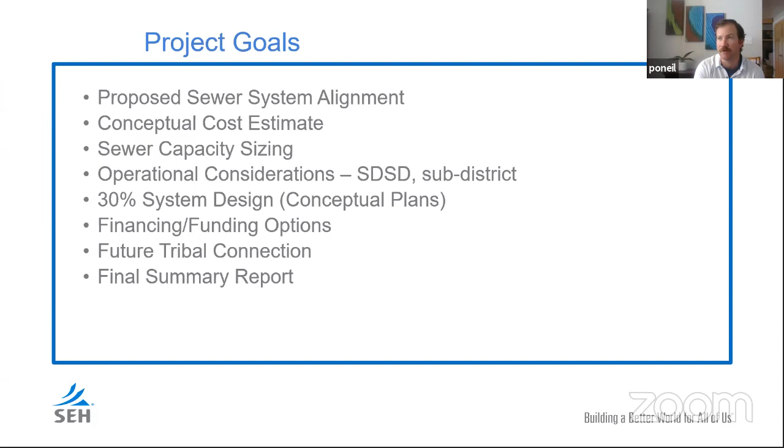The proposed sewer system alignments - we've developed conceptual alignments to serve this area. You can consider these as trunk lines or main lines. There will be additional lines that feed into this system. So we've just looked at kind of the main trunk lines to serve a majority of this area by gravity as much as possible, and where needed, lift stations and force mains, which take the sewer that we can't get to the main lift station. They then pump it up to the main lift station so that we can send it to the South Durango Sanitation District plant.

We developed phases to kind of break this project into reasonable chunks. By no means are these set in stone. They are our attempt at coming up with a reasonable phasing based on properties as well as location and relation to the gravity or lift station system.

At this point, I'm going to try to switch to some of these alignments to go through them briefly. The files were a little too large to attach to the PowerPoint presentation.

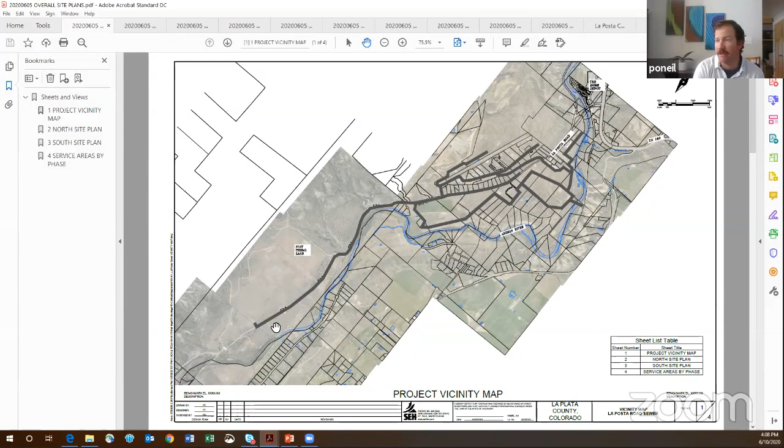Here's kind of the overall site. Being on this call, I'm sure you're all familiar with this area, but this is kind of the overall study area. Most of it is in the La Posta area here. This portion was added to evaluate the potential future inclusion of the Southern Ute Indian tribal land, in the event that they elect to develop and or connect to this system.

Here is a phasing map, which shows the different phases that we've broken out so far. Phase 1 here in green would be the initial lift station and river crossing to get sewer to the east side of the river, where it could be treated by South Durango.

Phase 2A and 2B, the reason we went with 2A and 2B, is either of those phases could come next sequentially, depending on where development or people want service first. Either could be developed next, and those aren't interrelated. Phase 3, 4, and 5, and then phase 6, the tribal portion, would all be dependent somewhat on the preceding phase number in order to work the way we have the system laid out.

Alternate 1 and 2 are attempts to impact certain properties less, depending upon the steps of the phasing. Alternate 1 is an option which would allow portions of phase 2B and phase 3 and/or 4 to develop without drastically impacting the properties it's crossing, whereas alternate 2 would work with those properties a little bit better, but would need to be designed and built according to their plans ahead of time.

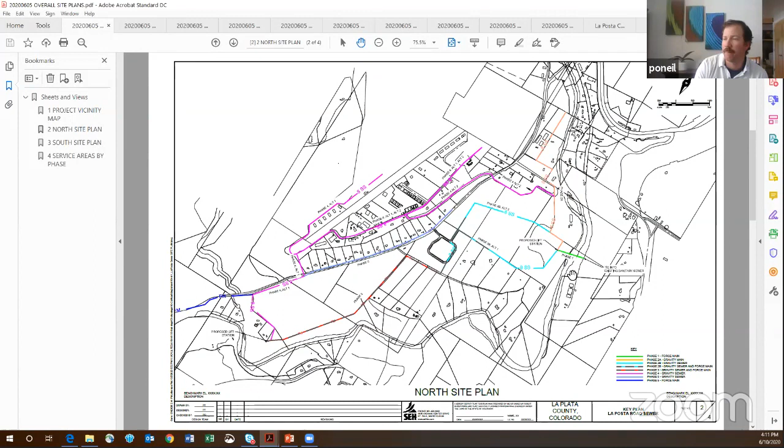And then phase 5 is a small portion along La Posta Road, and then phase 6 is the tribal portion. Here's just the properties that would be assigned to those phases.

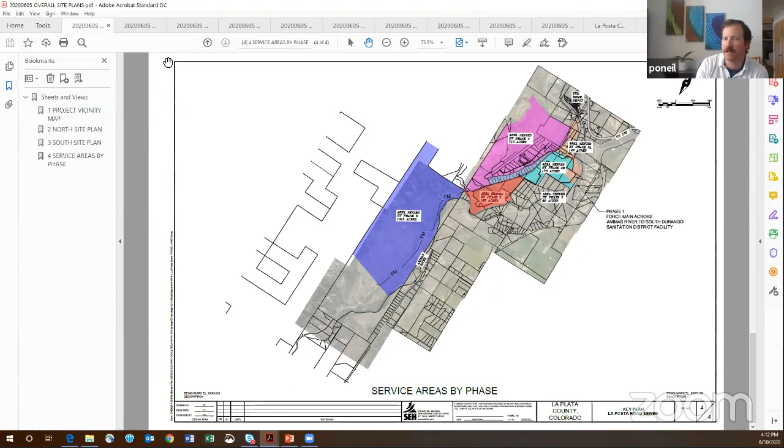I'm going to go briefly through these next plan and profile drawings. I don't want to spend a whole lot of time, they can get a little boring, but if people have questions at the end, we can bring these back up and look at them in more detail. Phase 1, lift station located near the well pad.

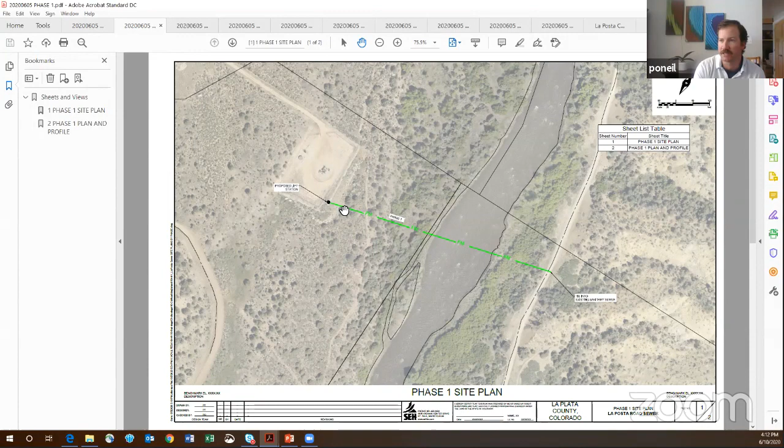It was brought up that this would be desirable, as no one necessarily wants to live right next to a lift station and no one wants to live next to a gas well, so we put them next to each other. The profile shows the sewer getting underneath the river and then tying into the South Durango main, which runs down this road here.

Phase 2A would be serving the northern Moose Lane, Casey Lane areas, and its corresponding profile. With this portion of the development being north, it's fairly easy to get gravity flow down to that lift station, as things generally flow a little bit west to east and north to south.

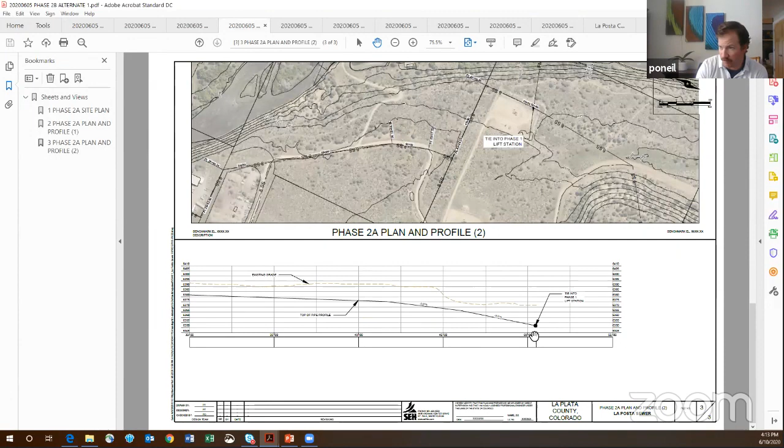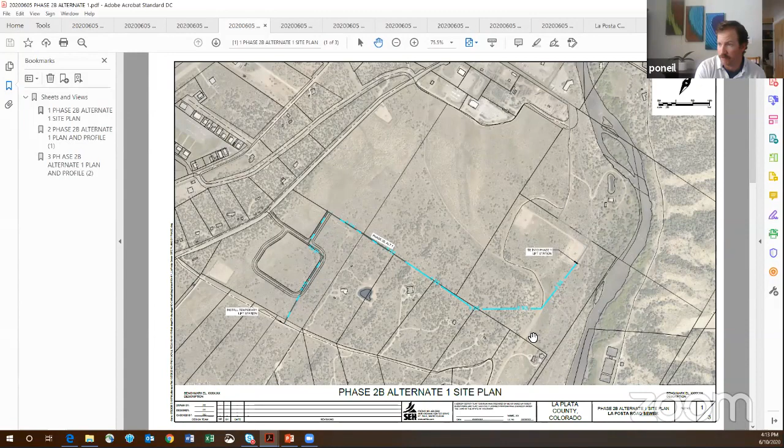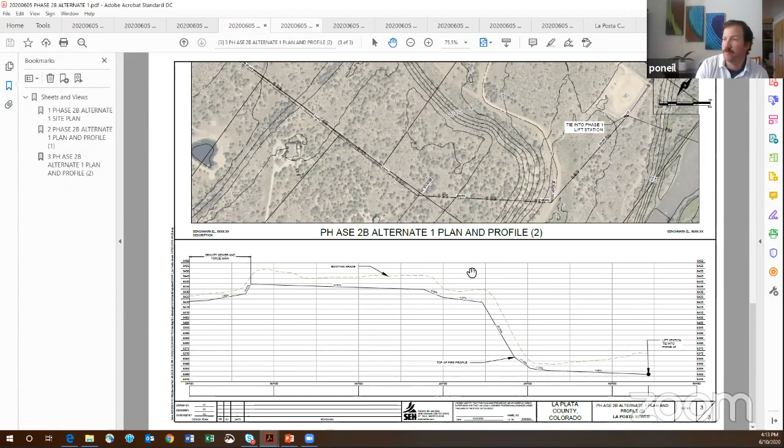Phase 2B, alternate 1, this would be along the property line between the Jackrabbit properties and the Carter properties. We would need to get an easement either from all the Jackrabbit owners or just the Carter properties, and this would be an alternative that does not impact these properties as much with a future development plan. The issue is the topography of those hills. Phase 2B, alternate 2 works a little bit more with the topography and could potentially be used by those properties as the trunk line connection. However, if these properties aren't ready to develop, the other alternative could be used ahead of time.

This is Scott Fab's property, and they have a conceptual alignment of roads that we added here to correspond to their plans for development.

Phase 3 runs down along the property lines between the two properties here that splits up Jackrabbit kind of from La Posta, flows down by gravity to a lift station that would be down here. So a gravity main would be installed along with a force main at the same time to then pump back up to get into the 2B gravity system.

Phase 4 serves the Animas Air Park, if that's desirable. Currently, they are on septic systems, but in order to potentially expand and provide additional density up there, they would most likely need to join the South Durango sewer system. The air park generally drains north to south, so this has the ability to capture everything by gravity.

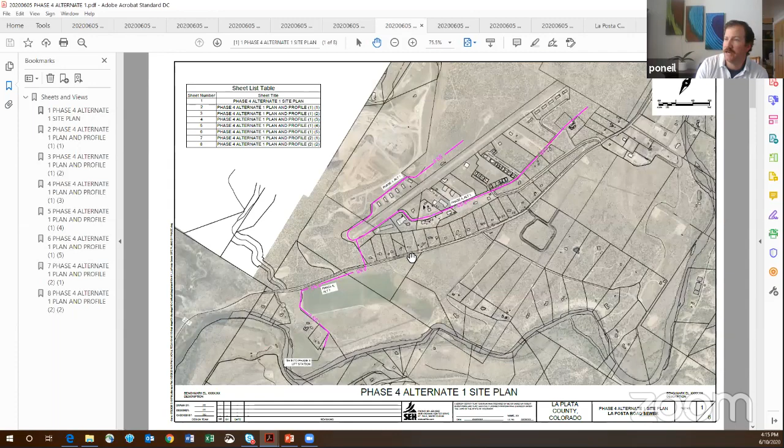We additionally looked at alternative 2 so that we could connect in earlier rather than waiting for the phase 3 lift station. However, we cannot serve everything by gravity because we are fighting grade here.

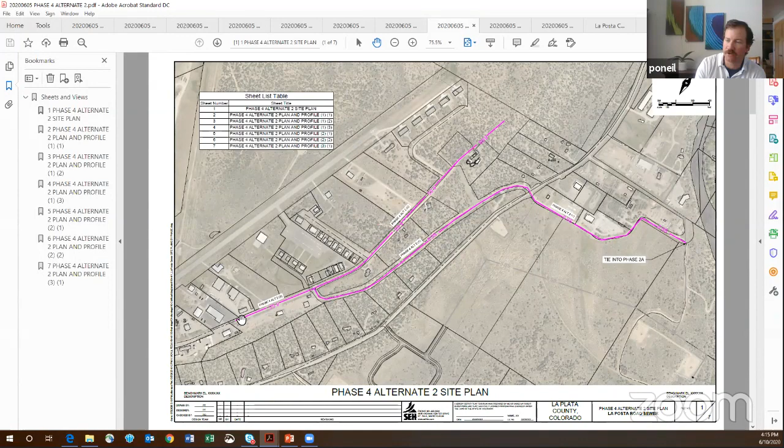You can see on this profile that we start to fight grade too much - that's as far south as we can get with that system while meeting South Durango's maximum depths for sewer manholes.

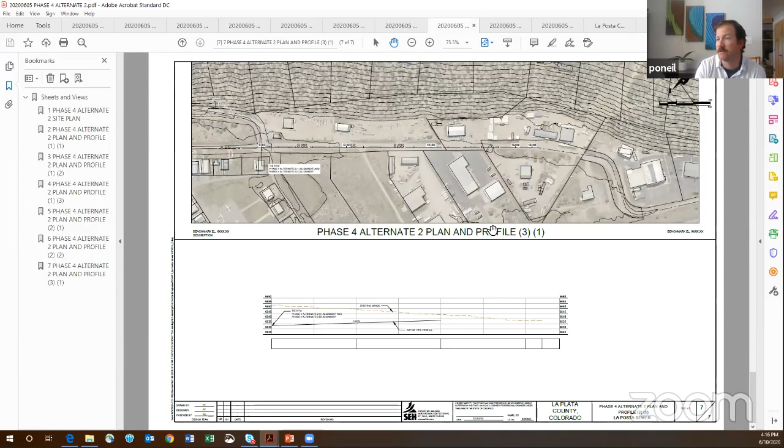Phase 5 seems unlikely early on, but as things develop and additional density becomes an option, this could be a redevelopment of these parcels to more density. So we wanted to put it in and get a cost for it.

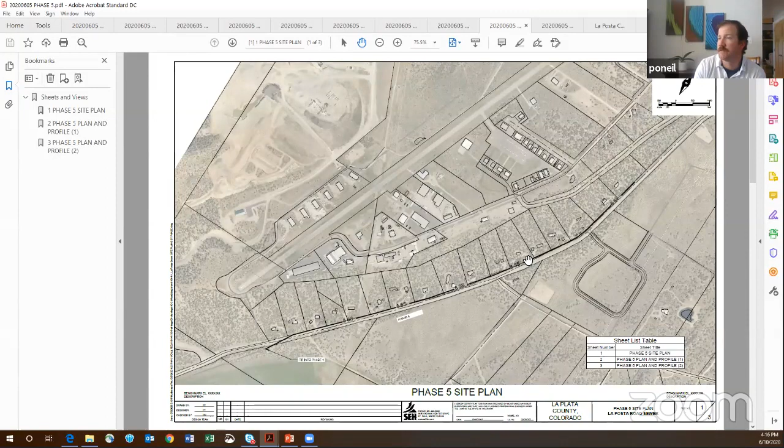Phase 6 is the force main for the Southern Ute Indian Tribe. They would have their own gravity collection system feeding a proposed lift station, and that lift station would have a force main running up La Posta Road, tying into phase 4 of the options I just went through.

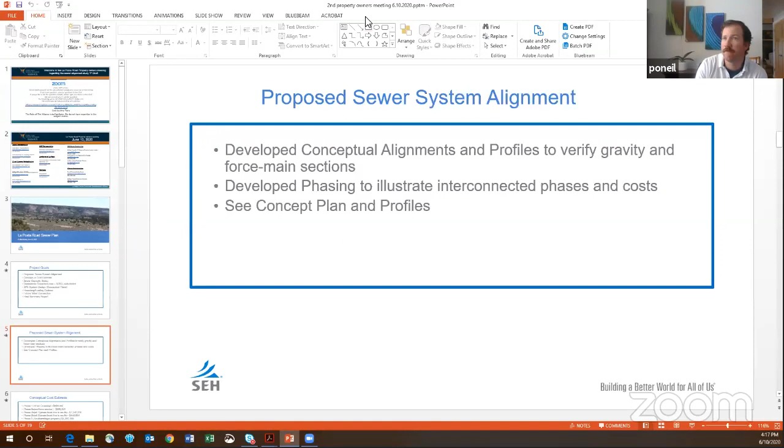I'm going to jump back over to PowerPoint. Let's see if I can pick up where I left off. As part of that study, a good portion is to come up with quantities and cost estimates for this project.

You can see here the varying costs associated with each phase for the sewer system improvements. It is pretty expensive, as anyone in development knows that these things add up fairly quickly.

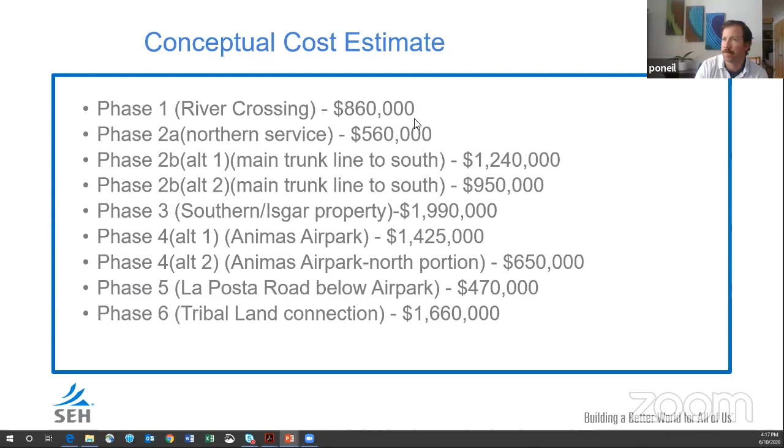Potential sizing and sewer flows - we used this to develop the potential density for lift station pump sizing, as well as sizing of sewer force mains and gravity mains.

There is quite a bit of area out there, and this is not a worst case scenario, but we look at sizing these improvements at a maximum density so that we don't run out of capacity in any of these lines.

Those ERTs, or equivalent residential taps, are basically the equivalent of one house for those different areas.

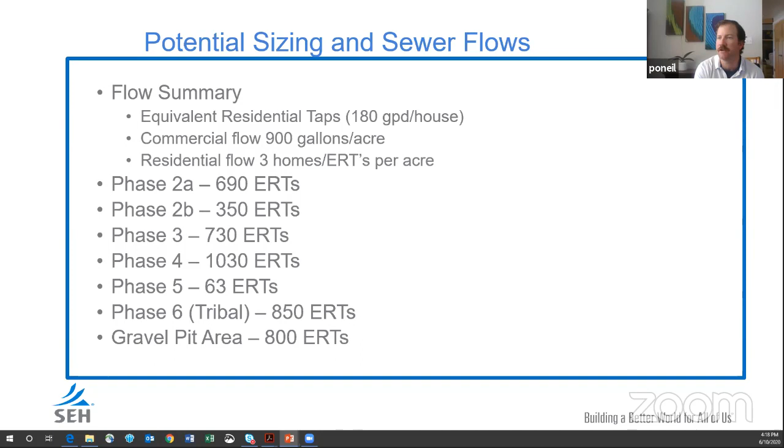Operational considerations I touched on briefly - the South Durango Sanitation District's boundary currently ends on the other side of the river. They would need to expand their district to serve this area.

There is also another option where a sub-district could be formed that would operate the lift stations and collection system and pay a fee to South Durango for treatment. Both options are viable - I think the easier one would be to expand South Durango's boundary, but that'll be a future decision when this goes to construction.

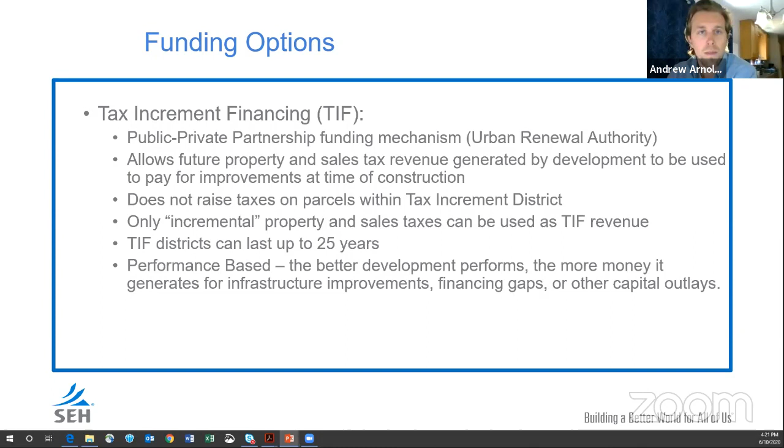Our other strategy is grant funding. This is a more traditional strategy that we're looking at. We found some great grants that align very well with the La Posta sewer line, and I think we have a compelling story that would make these grants realistic for being applied.

One of them is the U.S. Economic Development Authority, otherwise known as the EDA. They have public works and economic adjustment assistance grants that can be tailored for infrastructure improvements that would generate businesses, jobs, and so forth. There are also community development block grants issued from the federal government but allocated through DOLA, the Department of Local Affairs in the state of Colorado.

There's also a grant program called Build Discretionary Grants, which is for building up infrastructure to leverage development. It's a U.S. Department of Transportation program that aligns well with the La Posta sewer line. There's also the Energy Mineral Impact Assistance Program, a state funded grant that La Plata County aligns really well with, so the La Posta sewer line could also align with it.

The other funding option is debt financing. This is typical, however there are some federal agencies and state agencies that offer debt financing for infrastructure improvements with extremely long terms and really low rates that I think would work well. We see this as a great strategy for getting the sewer line funded.

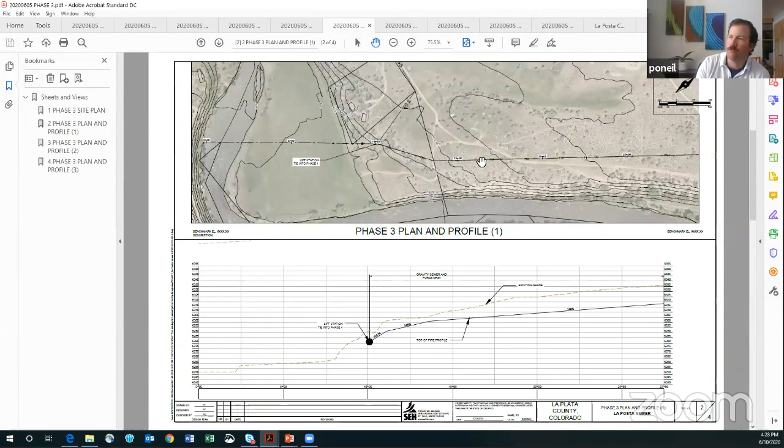This parcel drains to the east, and the thought is that some sort of development and/or road system would be on this parcel, with the pipe on the eastern edge of the parcel to capture gravity flows, as well as the lower Isgar properties which all drain to the river. The thought is to put the trunk line at the lowest portion of the property. It isn't intended to actually be on Kiva Road, but adjacent to Kiva Road.

Some of these questions have the same answer. We would not be going down Kiva Road — that's a private road that you guys own and maintain. We would be developing adjacent to it on that future parcel. I think that answer satisfies questions 2, 3, and 4 potentially.

All these were related to that Kiva Road access. I'll skip ahead and say that the sewer lines are intended to be near the property lines and at the bottom of the drainage path. However, we aren't intending to put them directly on Kiva Road, but to put them underneath a new road network on that vacant parcel.

Curious question here is as to why you proposed running the sewer line that far south. That is the old Sky Ute gravel pit entrance. Right. And so based on discussions with Andy in that previous plan, I was under the impression that that was the connection point. Is it further north?

Well, yeah, I'm glad you have it on there because of exactly what you pointed out. It's a good location. But when we were originally talking with SEH, what we were looking at was further north where you see that road diverge to the west. And so maybe on the future phase, you could propose maybe doing two costs: one being to that road that splits off to the north, and then the cost that you have in there right now down to the location where you have it. I don't know if it'll make much of a difference, but at least we could evaluate it both then.

So Roger, can you hear me? Yes. Okay, so part of it too is that that's the south end or low end of the property where all the sewage would collect, and you'd collect it there and pump it all the way back up. So one thing is just to get the force main to the property, but the other thing is to actually serve the property, you need to put the lift station towards the bottom end of it. Okay, so even if you put it further north, then eventually if you wanted to extend it south, you'd have to put a new lift station down on the south side.

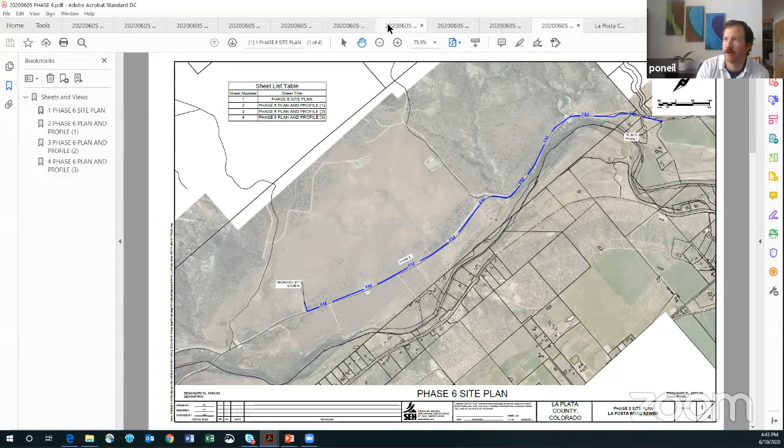Okay, I have a question from David Tart. In regards to easements along the Deer Island properties, what does that entail? I guess, and I apologize, I don't know all the properties by heart, but I believe these are the Deer Island properties. If we are crossing somebody's property, we would have to get an easement to put that infrastructure in.

If we are to stay on this vacant property, I forget the ownership right now, then that would just be part of a kind of a development plan of water, sewer, roads, that kind of infrastructure. And so the intent would be to tie on, piggyback with those developments for this trunk line to go underneath their road system.

Would there be any cost to the property owner? I don't know exactly which property it is, but if it's a private single family residence, I don't think so. There are different bonding and funding mechanisms that could tax the entire area, but I don't believe that's the route people want to go down. I think some of these funding options would tax or bond the properties that are going to be developed, trying as much as possible to leave single family homeowners not interested in development out of that.

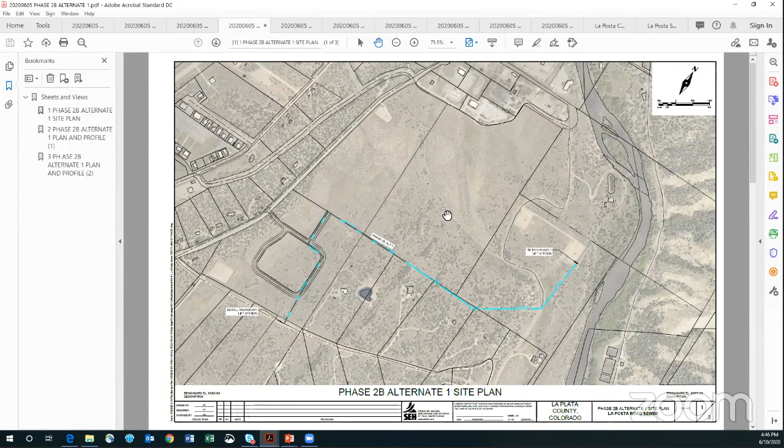Paul, I have another question regarding Deer Island. Please explain why the Deer Island boundary option A is better than B for phase 2. Is this a logical route for a future road? Could you say that again, Emily? I'm not following it. So I would stay in phase 2. Can you please explain why the Deer Island boundary option A is better than option B for phase 2, and is this a logical route for a future road? Yes, I believe it is.

Yes, this alternative 2 for phase 2B is a road that would potentially serve both sides of those parcels, as well as function better for gravity sewer. The area adjacent to the Jackrabbit properties is a pretty steep hill, so more of the property could flow by gravity here and utilize less sewer line than if it were to go down the property line.

Would a pedestrian bridge with sewer be less expensive? I don't know, I'll have to look into that a little bit. I think the sewer portion might be less expensive, but then you've got to factor in the bridge component.

I was going to add that in previous meetings when we did the land use plan with the county and the city, the pedestrian bridge concept was talked about. And if I recall, Vicky, nobody seemed to like that option to have a pedestrian bridge across the river at that location. So that could change in the future, but the original plans were developed without a pedestrian crossing or any kind of river trail along that river corridor.

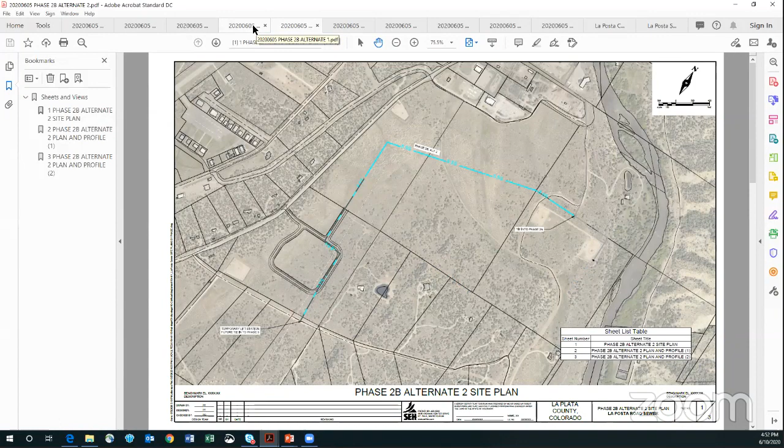La Posta Road is higher than that parcel adjacent to Kiva Road. And so we always try to put sewer trunk lines at the lowest point on a property, because like drainage, sewer needs to go to that lowest point. Otherwise you're fighting grade and it becomes deeper, more expensive, and you might not be able to serve the entire property. That being said, it is always cheaper to put in one sewer line than two. However, we want to put the one sewer line at the lower end of the property, and that's why it's there at this time.

If you have the lift stations on the oil pad, the grade issue becomes different, right? Yes, the grade issue would be different if we were to move the tie-in for 2B to the west along that oil pad. It might be higher than it currently is.

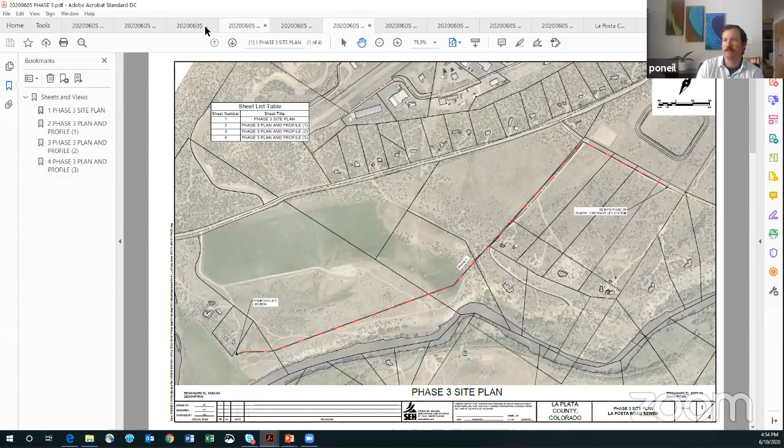Would a pedestrian bridge eliminate a force main and use gravity? It could. It depends on the grades of that pedestrian bridge. The issue with that would be you might lose some of it. If it were to flow by gravity from here all the way across, that would mean that we couldn't serve this property because the sewer line would be starting at grade along the ground. And so we would have to push development further away from it. There's a potential, but typically it would be pumped.

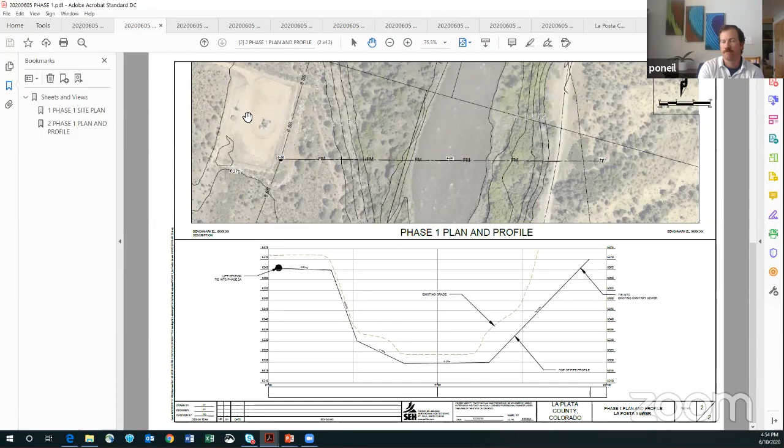Okay, will I have any more questions coming in? Any comments that people would like to make? I could unmute you if you'd like to talk. Anyone?